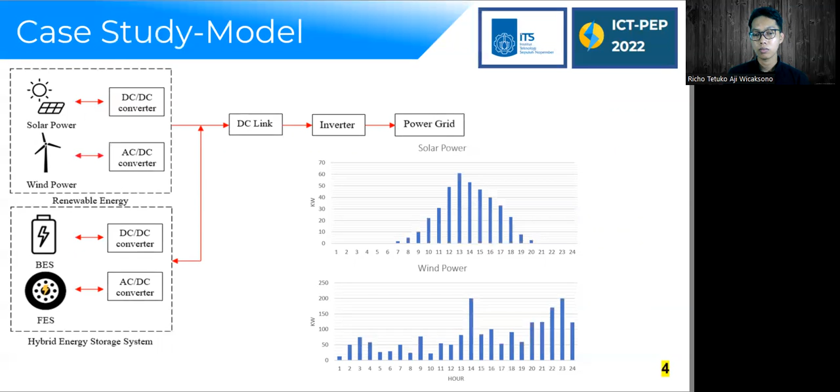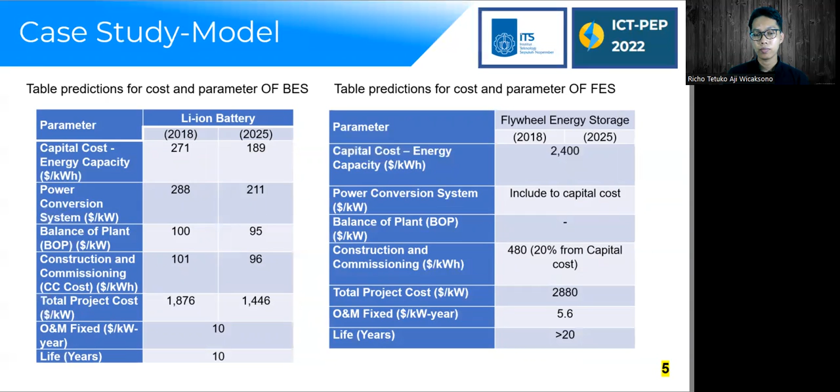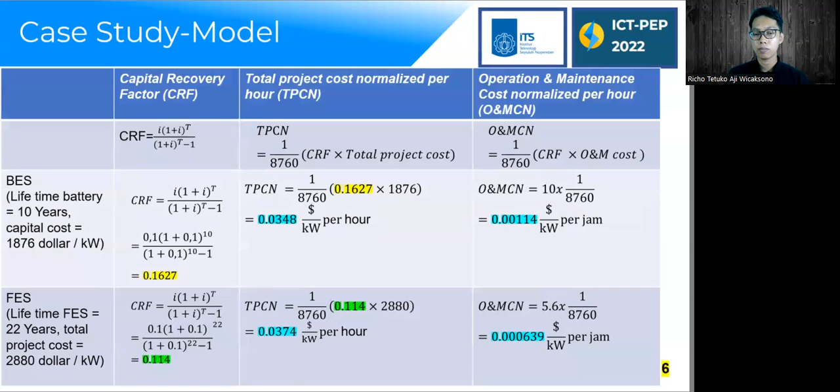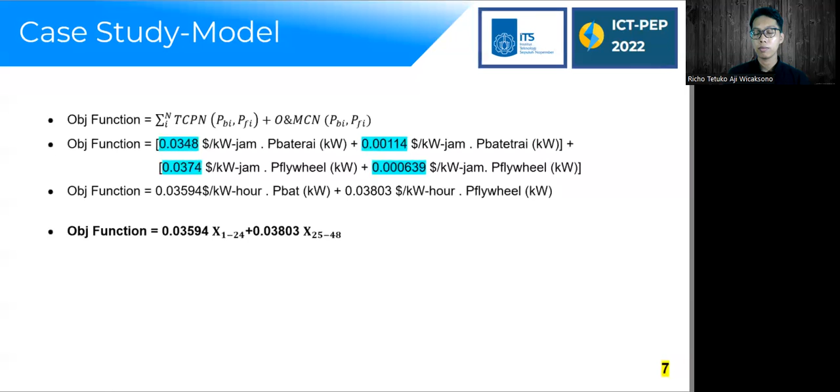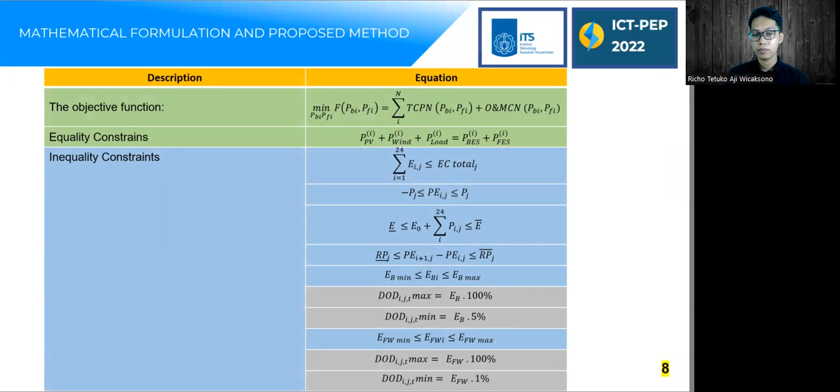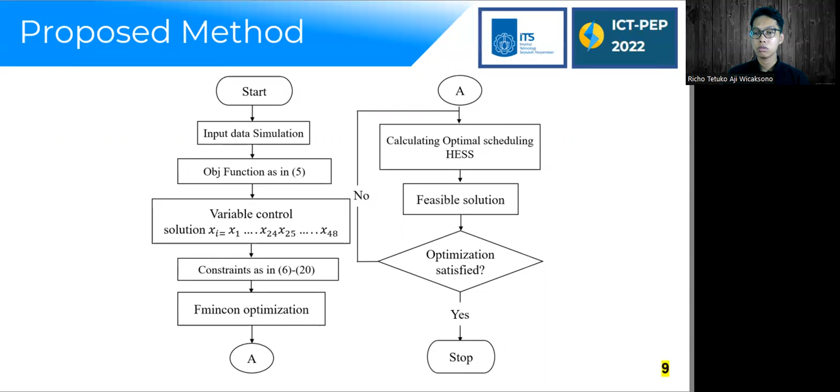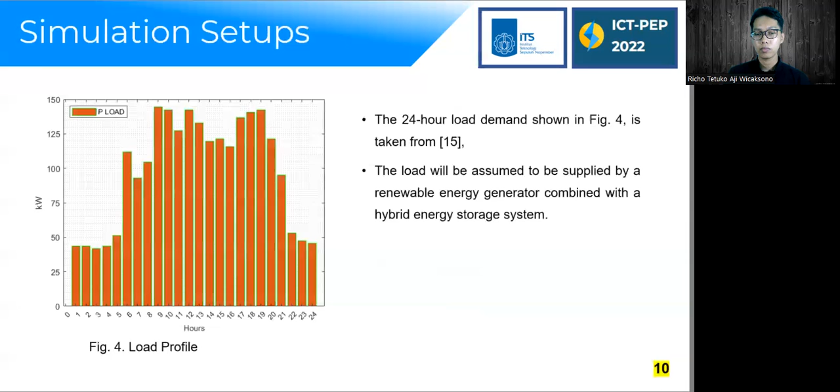There is a 24-hour load demand shown in figure 4. The load is assumed to be supplied by a renewable energy generator combined with a hybrid energy storage system. Figure 5 shows that hourly wind energy varies. Solar power increases every hour as it approaches noon, reaches its peak at the 13th hour, and after that decreases. This is closely related to solar radiation as an energy source. The total power from solar and wind will supply the load, and the rest will go to energy storage.

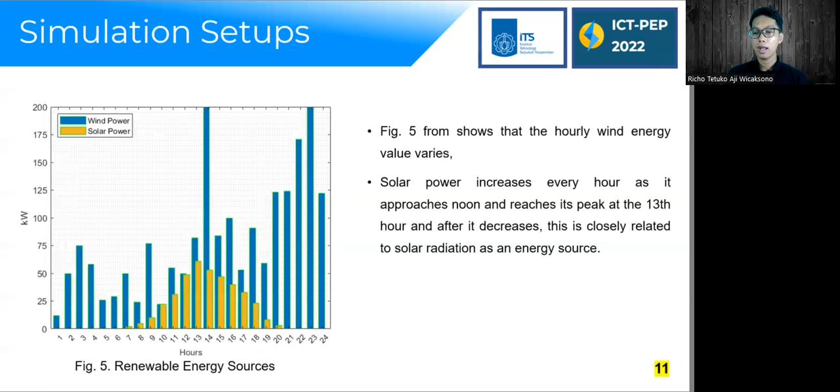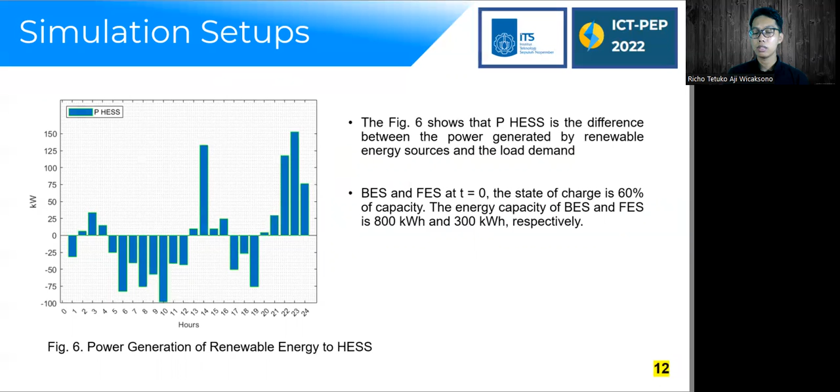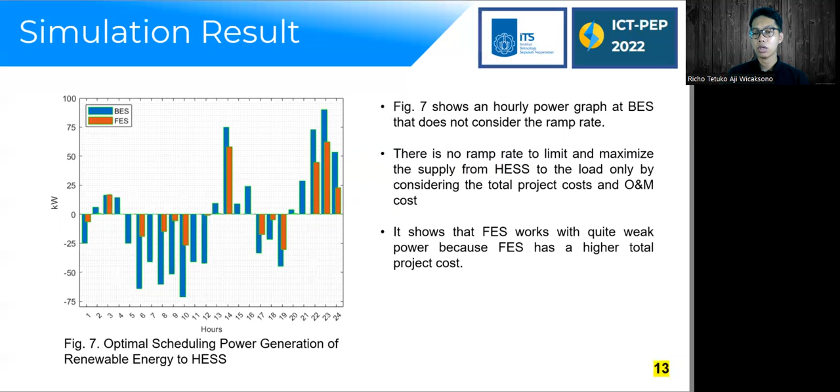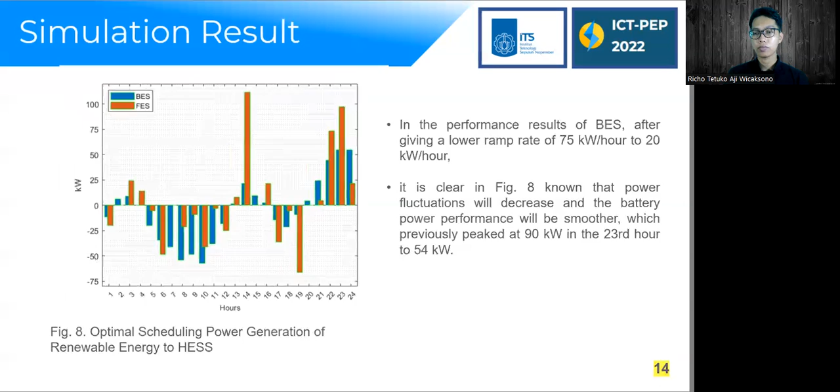Next, when comparing FESS power in figure 7 and figure 8, FESS power performance increases because when the ramp rate of BESS is reduced, the power responsibility is transferred to FESS. This is a realistic condition because FESS provides high power but has the disadvantage of low energy density.

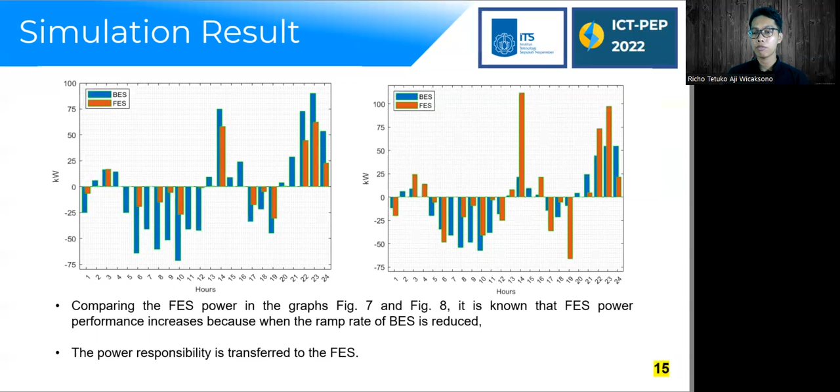The conclusion: for optimal HESS scheduling without considering the ramp rate, the optimization works to favor the lower price of each type of energy storage technology. For optimal HESS scheduling when the ramp rate is considered on BESS, the power performance of BESS becomes smoother, as shown by the difference between figure 7 and figure 8.

FESS power performance increases because when the ramp rate of BESS is reduced, the power responsibility is transferred to FESS. FESS has a weak energy density, so it combines with BESS, which has a high energy density. BESS works at low peak power with a low ramp rate, extending the life cycle of BESS. Optimal HESS scheduling overcomes the weakness of BESS because high power demands are compensated by FESS, and the weakness of FESS, low energy density, is helped by BESS.